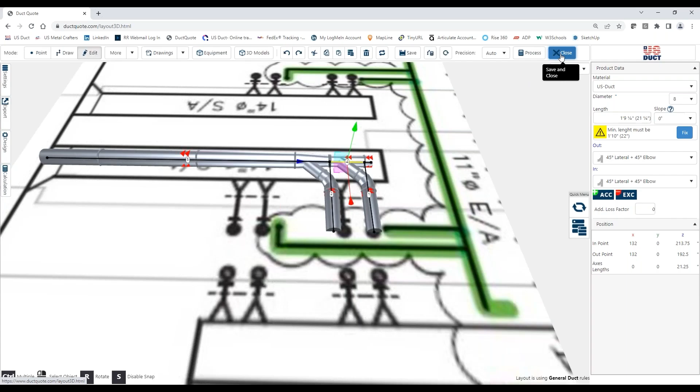So that's example one. All right, so taking a look at example two. Example two, we're going to be talking about the length of those branches. And you've got tight tolerances where trunks have to run, if that's the issue, and you're combining two subsections from opposite directions. Well, you might not be able to use a Y branch because of the actual position of where those opposing subtrunks are coming from.

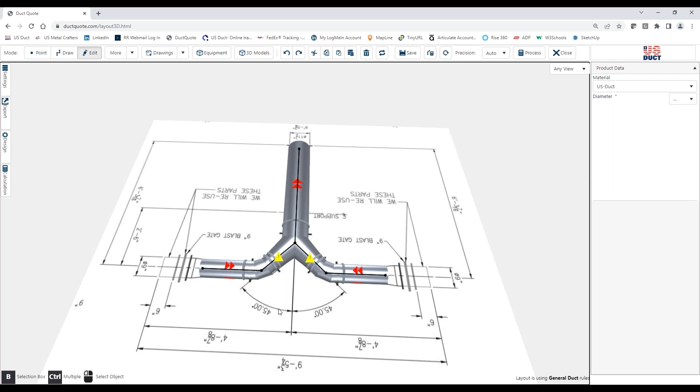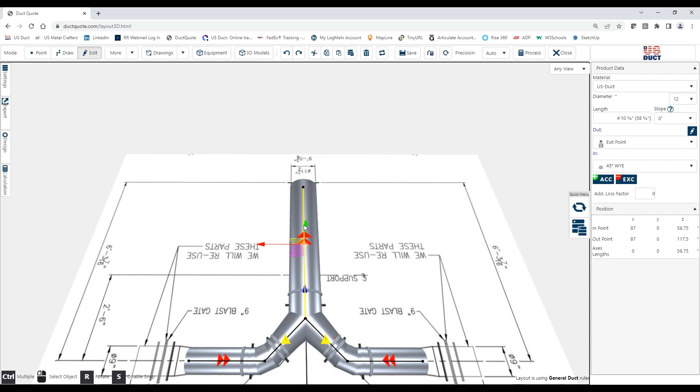And you can see here that where they had given the actual size of their combined subtrunk, one of the issues was that they wanted an 11.5 inch diameter piece of duct. Well, we don't make that. We make whole integer diameters, if you will. So we offered them a 12 inch, which they accepted, but they still needed to combine two sections that were both 8 inches. And as you can see here, that means that once again, we've got, looks like about 2

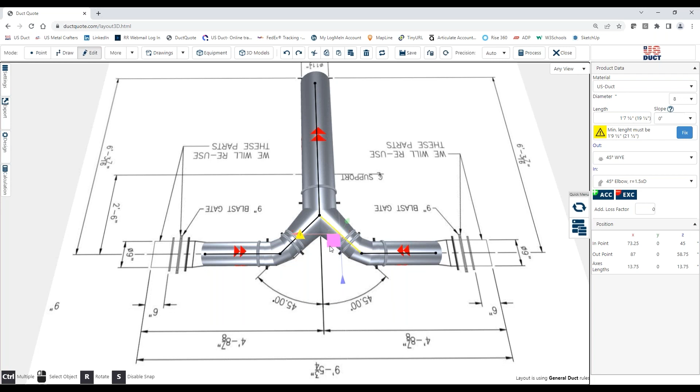inches of difference. Now, if this has got to be hard connected, 2 inches might not be a big deal unless you do have to hard connect. And then it can become a huge deal. So how could you do this? Well, one way to get around this might be, instead of using a pants Y, we might be able to do this as follows. If we take this out, and what I'm going to suggest is an elbow followed with

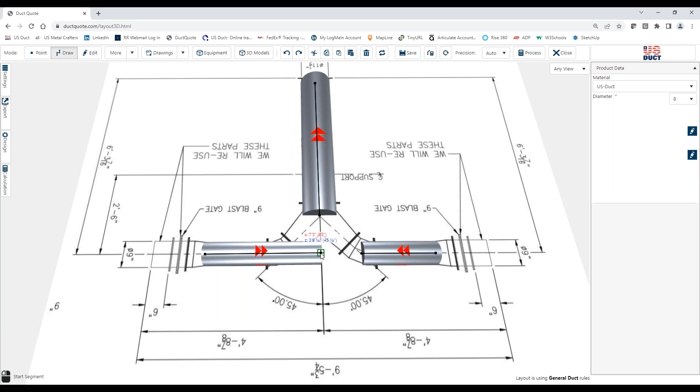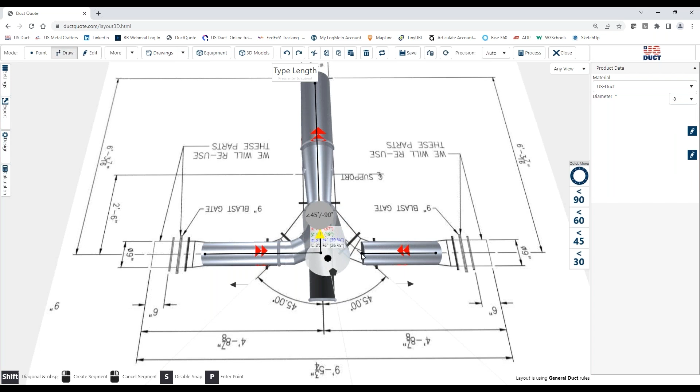a branch, okay? So if we were to come down and extend this, and I'm just arbitrarily choosing this side to do this, and we're now going to draw up and connect. Now, because I'm bringing two dissimilar sizes together, Duct Quote assumes I'm trying to create a branch. Well, I am, okay? But if we now draw from here at 45 degrees, and this will again be our 8 inch, and bring it over and connect it,

you can see that we still have to make this longer. So if we do that downstream, okay, we can kind of move this back, and I'm going to redraw this so that I can actually reach the correct. We're going to draw that again, 8 inch at a 45-degree angle. I'm going to come down till I am even with that. And as you can see now, we didn't have to move this in. Let's say that's one of the criticals.

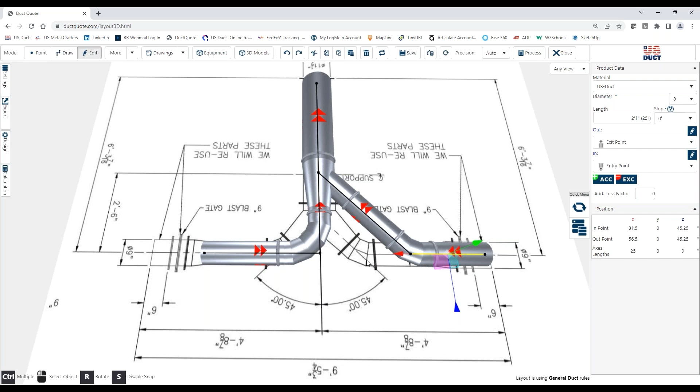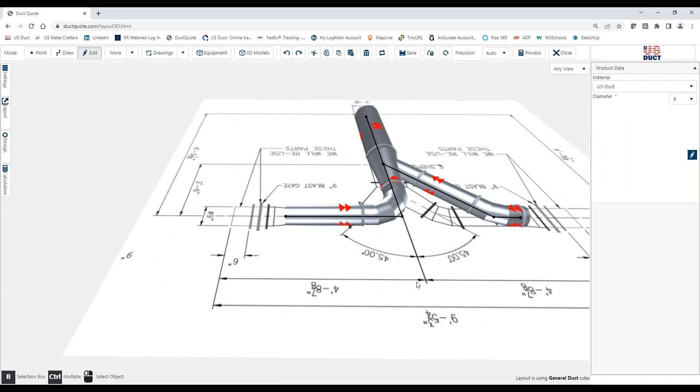And we didn't have to move these two opposing sizes, but we did have to change how we handled the connection there. And this all now works with standard size. And if we needed to change this back, we could bring this back just to the elbow, it looks like. And you can see that we're now finishing at those reducers, and that would work, right? So that's what we mean by a combination of an elbow and a branch. Sometimes this is a much better way. It sometimes is also better for your pressure loss. So let's close out there.